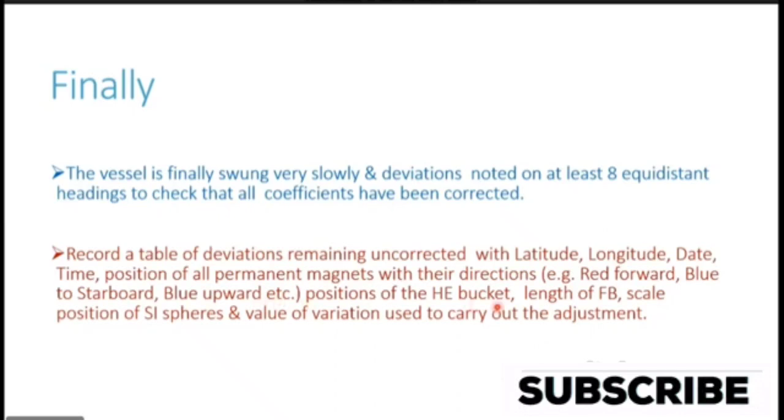For example, for a fore and aft magnet, the marking made on the deviation card is red forward, or blue to starboard for an athwartship magnet, and blue upwards for a heeling error corrector magnet. The position of the heeling error bucket, the length of the flinders bar, and the scale position of the soft iron spheres are all noted down in the deviation card.

Also, the value of variation present at that location, which was also used to carry out the adjustment, is noted down in the deviation card, thus completing the correction of the compass and preparation of the deviation card.

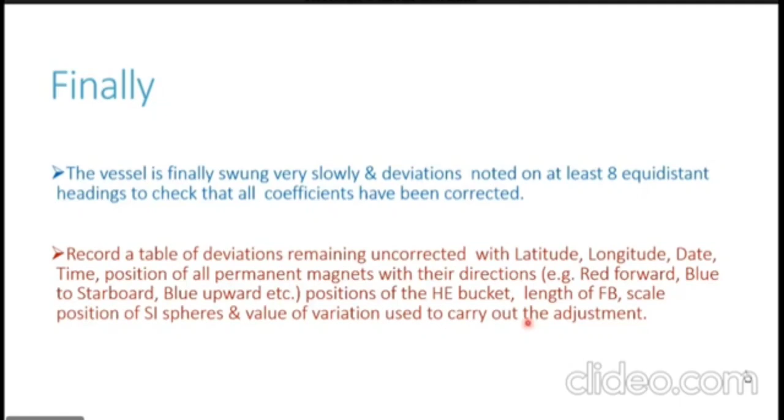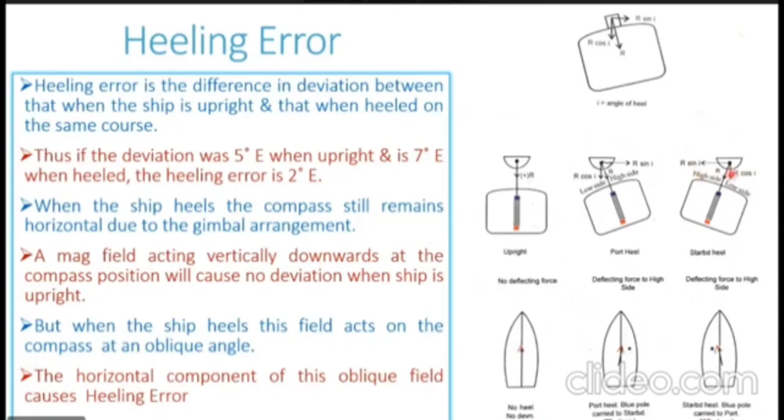Now when the vessel is rolling, this oblique field or force acts in opposite directions during the port and starboard rolls, leading to oscillation of the compass card.

You can see in this condition the vessel was upright, the vertical field was not causing any deviation - no heel, no deviation, no deflecting force. When there is a port heel, the vessel's hull heels to port, the compass bowl remains horizontal. The horizontal field of this oblique magnetic field, R sine I, now acts to the starboard side of the ship. So there's a deflecting force to the high side, the starboard side, and we have a blue pole to the starboard side of the compass location, causing easterly deviation. So as mentioned, on port heel, the blue pole is carried to the starboard side, generating easterly deviation.

Now when the vessel heels or rolls to the starboard side, this oblique field acts in this direction - you can see the R sine I component of the field acting this way. So the deflecting force is towards the high side, which is the port side. In case of starboard heel, the blue pole is carried to the port of the compass bowl or compass card, generating westerly deviation. This blue pole attracts the red end of the compass needle pointing towards north, generating a westerly deviation.

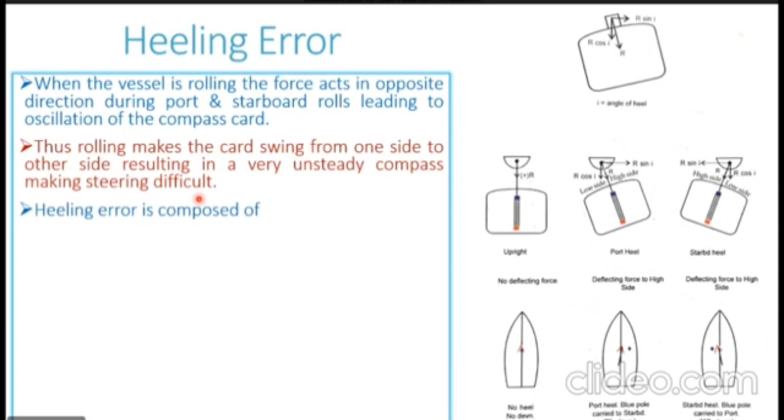Now this heeling error is composed of two components. Heeling error could be generated because of permanent magnetism of the ship - in that case it's known as permanent heeling error, generated due to the force R or component R. In this diagram, we see this permanent magnetism of the ship, the vertical component R of the permanent magnetism, causing the permanent heeling error. The permanent heeling error varies as the cosine of the compass course.

The second cause which can generate heeling error is induced magnetism in the ship, called induced heeling error. This is predominantly caused by induced magnetism in two kinds of structures. If we have a vertical soft iron, VSI, above or below the compass - also known as a K rod - this VSI exactly above or below the compass generates induced heeling error. For example, if we have a centerline bulkhead in the accommodation with a lot of vertical stiffeners welded to it, this centerline bulkhead will have a substantial soft iron component, inducing magnetism that generates induced heeling error.

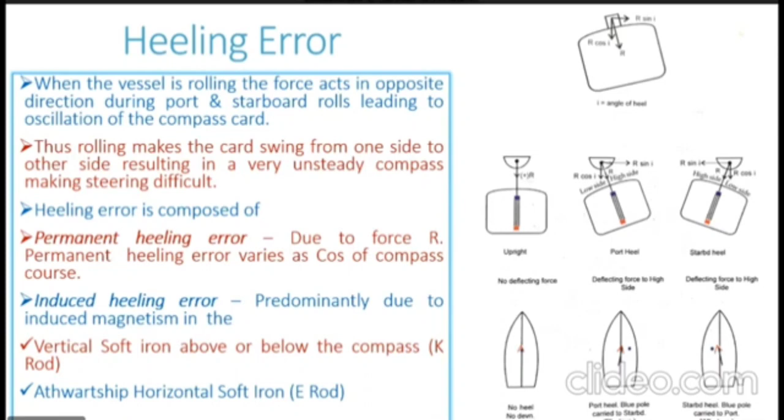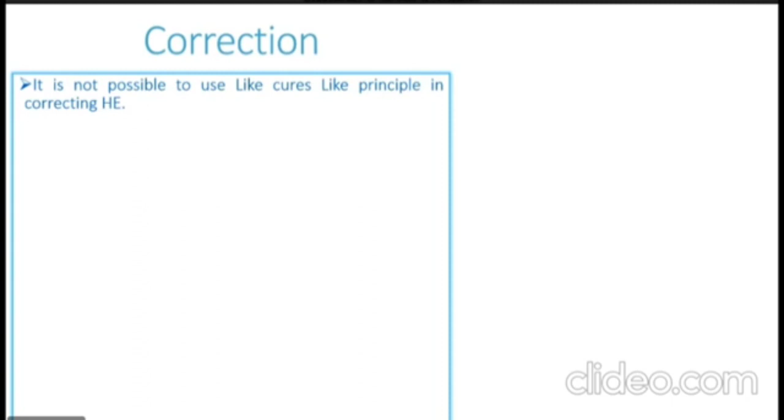So now we have seen that the heeling error is caused because of permanent as well as induced magnetism of the ship. As per our correction principle of like cures like, we should correct both these components with their respective correctors: permanent should be corrected with a permanent magnet, induced should be corrected with an induced magnet or a soft iron corrector. But we are not able to use this principle.

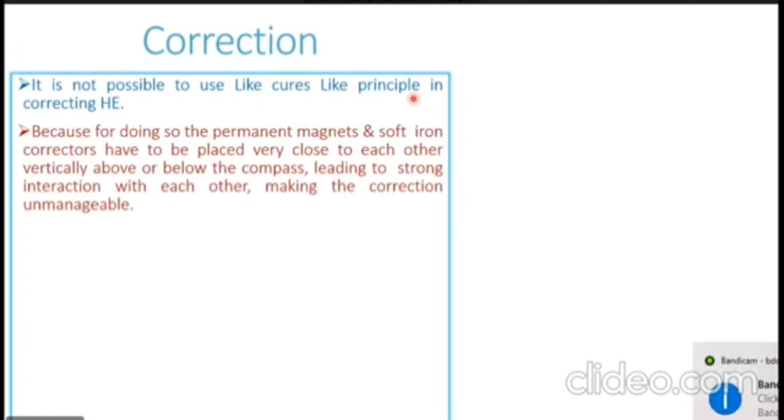Reason for this is, if we use the like cures like principle, the permanent magnets and the soft iron corrector will have to be placed very close to each other, vertically above or vertically below the compass. Since the permanent magnet and the soft iron corrector are very close, it will lead to a strong interaction with each other. The permanent magnet is going to generate a lot of induction in the soft iron corrector, making the correction unmanageable.

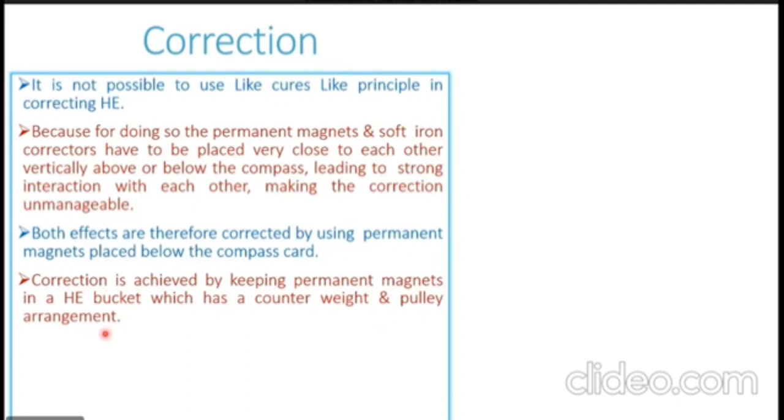Because of this reason, both these effects, permanent heeling error as well as induced heeling error, are corrected by using permanent magnets placed below the compass card. Correction is achieved by keeping the permanent magnets in a heeling error bucket, which has a counterweight and pulley arrangement. Let me show you in the diagram.

You can see the diagram of the heeling error corrector. We have the compass card in this location, and this is the binnacle. We have a permanent blue pole. You see the ship's blue pole below the compass. In the previous slide example, we saw that there was a blue pole exactly below the compass.

So now what we have here is, exactly below this compass card, we have a chain and pulley arrangement. You can see this pulley here, or you can call it a sprocket wheel, with a chain attached to it. On one end of this chain we have a counterweight, just to balance the heeling error bucket, and on the other end of the chain we have the heeling error bucket.

There are vertical slots in this bucket in which the magnets can be placed. So we place vertical magnets in this bucket. You can see these vertical magnets placed in the bucket. The magnets are placed in such a way that the correct end should be closer to the compass card.

In this particular example, we had a blue pole of the ship which was affecting the compass. So we have placed the permanent magnets in such a way that their red pole is closer to the compass card, thus correcting the heeling error. So this is the heeling error bucket, with the vertical magnets placed inside it.

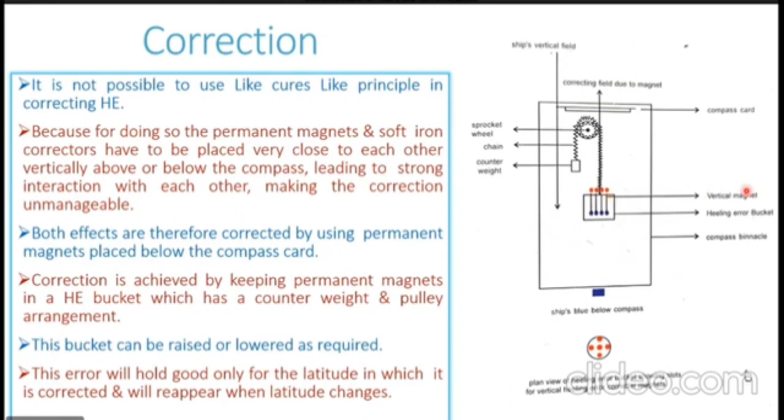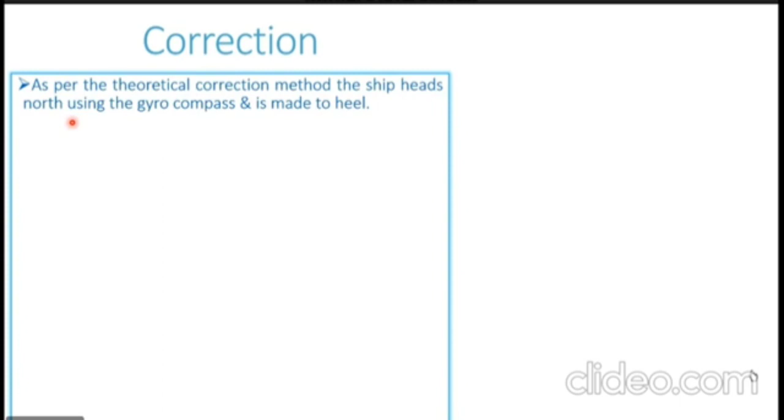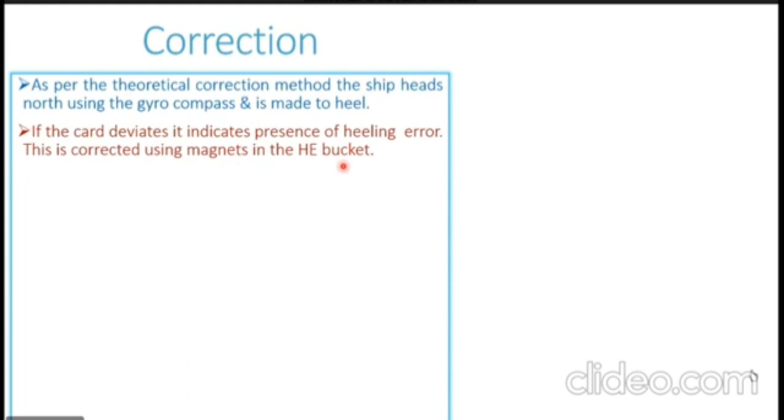Now, going further into the correction of heeling error, as per the theoretical correction method, the ship is made to heel when it is heading north, and when the ship is made to heel, the heeling error is generated. The card deviates, indicating the presence of the heeling error, and whatever the heeling error is, this can then be corrected using the magnets in the heeling error bucket.

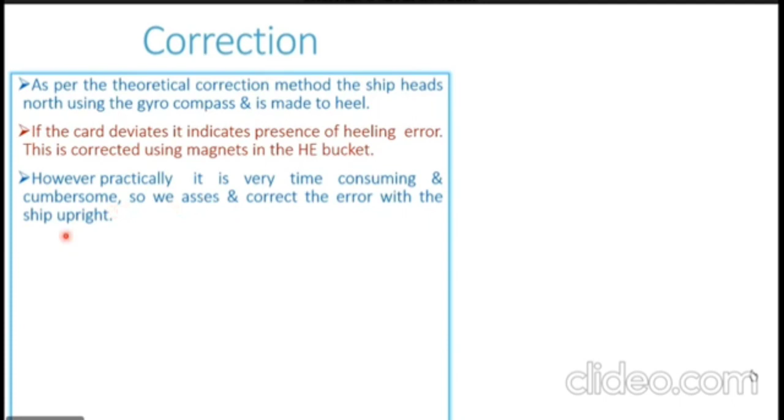Now, practically, this method is very time consuming and cumbersome. It takes a long time to heel the ship to one side, and we need a substantial heel angle to properly judge the heeling error and correct it. So instead of heeling the ship, we assess and correct this error with the ship upright. So how can we judge this error in the upright condition?

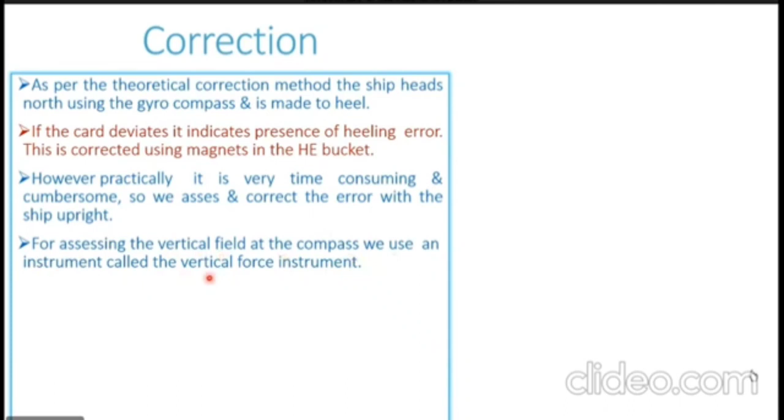For this, we use a special instrument known as a vertical force instrument, in short a VFI, to assess the vertical field at the compass location. Let me show you the diagram. A vertical force instrument, or VFI, is very similar to a dip needle.

A dip needle is free to move in the vertical plane, and wherever on Earth it is placed, as soon as it is released, it aligns itself in the direction of the magnetic field lines, giving us the dip angle. So this VFI is also very similar to a dip needle.

We have a knife edge support, and on this knife edge support we have a magnetic needle. This magnetic needle is free to move in the vertical plane. One end is the blue end of the magnet, and this is the red end of the magnet. On this knife edge support, it is free to move in the vertical plane.

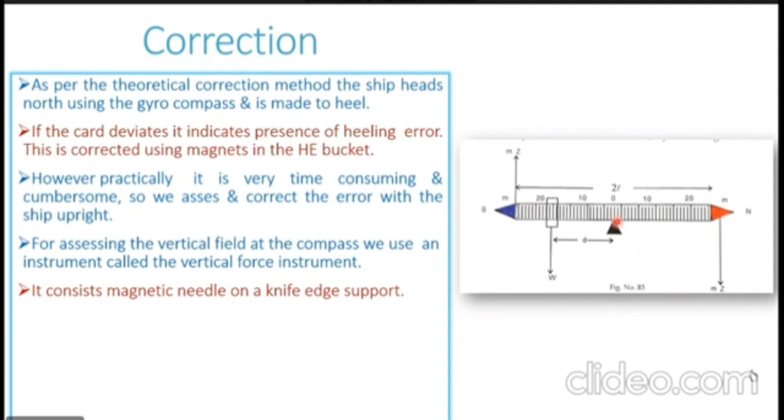What the compass adjuster does is first take the VFI, the vertical force instrument, and place it at some location ashore, away from any disturbing magnetic field. When placed in an area with no disturbance from any magnetic field, this needle aligns itself in the direction of the Earth's magnetic field. In the northern hemisphere, the red end will point downwards. In the southern hemisphere, the red end will point upwards.

Now there is a slider weight provided on this needle. You can see this particular weight here. This weight can be moved to whichever location we require. There is also a scale provided, so we can see the scale location of the weight.

So what is done is, let us assume we were in the northern hemisphere, and the red end of the needle has gone vertically downwards, pointing in the direction of the magnetic field line, while the blue end has gone upwards. This weight is initially placed exactly on top of the support, and as soon as the needle stabilizes with the blue end pointing upwards and red pointing downwards, we slide this weight to the high side, towards the blue side.

We slide it towards the blue side. Now the force of gravity is going to counteract the force of the magnetic field, and this blue end, which was pointing upwards, will slowly come down. As you take the weight away from the support, the lever at which the weight is acting increases, and it starts to balance the magnetic field.

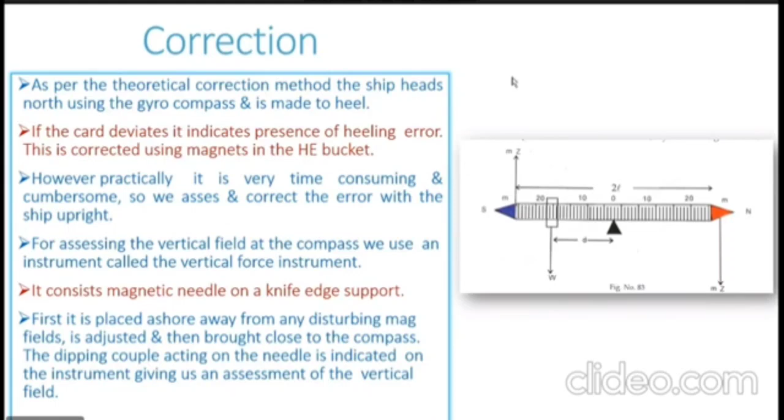A, B, C, D, and E, and we have seen how they are corrected individually. Now we are going to see when a compass adjuster actually corrects the compass on board, what is the sequence he follows in correcting the compass and what are the steps involved in the correction.

The first and foremost important thing to consider for the compass corrector is the order of placing the correctors. We have correctors for correcting different coefficients. The first thing which we need to analyze is what should be the order in which the correctors should be placed. We cannot place them as per our liking and choice. We do not have a choice here. They have to be placed in a specific order only.

This order is, first of all, the soft iron correctors are placed in the compass binnacle. And among these soft iron correctors also, we have the Flinders bar followed by the spheres.

After placing the soft iron corrector, the next correction which is done is the heeling error correction. So permanent magnets are placed in the heeling error corrector bucket and the error is corrected. After the heeling error correction, the next correction we do is placing the horizontal magnets to correct permanent B and permanent C. The larger coefficient out of the two, between permanent B and permanent C, is corrected first, and the weaker coefficient is corrected later. This is the sequence we follow for correction.

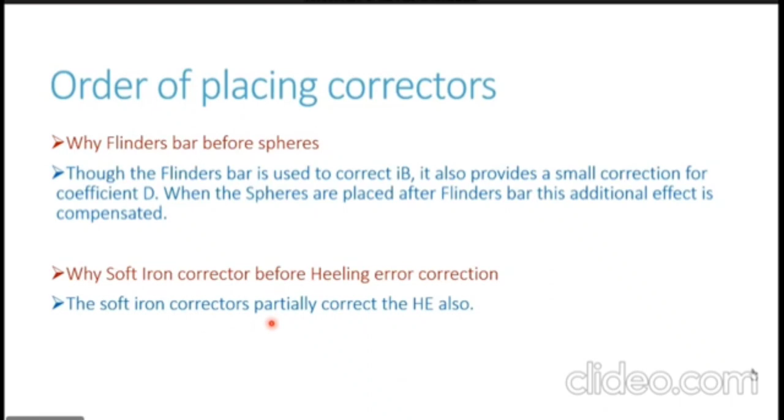Second, why the soft iron correctors are placed before the heeling error permanent magnet correctors: the soft iron correctors partially correct the heeling error. So once you place the soft iron corrector, the heeling error is corrected partially, and whatever heeling error remains can then be corrected by placing the heeling error correctors. In case the soft iron correction is not done before, the heeling error correction will be overdone. The heeling error will be over corrected.

Now the third concept: why do we place the soft iron correctors before the permanent correctors, that is permanent B and permanent C? The soft iron spheres increase the mean directive force at the compass location, thus allowing for a more accurate correction of permanent B and permanent C later on. As the spheres are placed, the mean directive force at the compass location increases.

This increase in the mean directive force results in reduction of the deviation because of any coefficient, giving us a more correct and accurate correction for permanent B and permanent C. The permanent correctors also induce some magnetism in the soft iron correctors, causing a disturbing field at the compass location. When the permanent magnets are placed after the soft iron correctors, the adjuster is able to compensate this disturbing field. Since the cause is the permanent magnet, when it is placed later on, it can be adjusted so that this extra induction does not cause any disturbance in the compass correction.

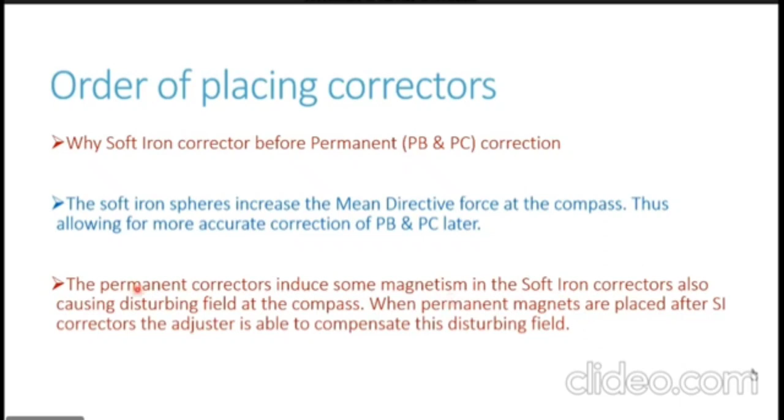Now there are many variations in the methods which we use for compass correction. Some methods are used to correct the compass, a brand new compass where there are no correctors placed for a brand new ship. And some of the methods are used for adjusting the compass later on, a partial adjustment.

Now what we see here is the analysis method, which is used for a full scale correction of the compass. That means if we have a brand new compass without any correction placed on board, the analysis method can be used to correct that compass and prepare the deviation card. So in this method, deviation is observed on various headings, analyzing the coefficients and then making the corrections in the order of placing correctors as we discussed in the previous slides.

Once the correctors are placed, the ship is re-swung to check for any large deviations left, finally leaving only a small amount of deviation.

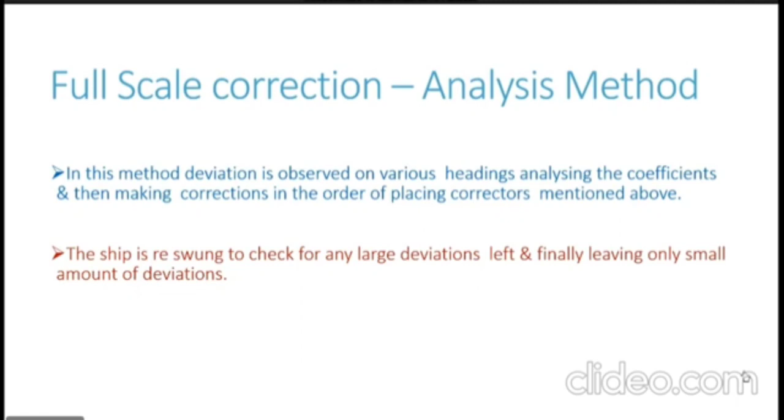So with the order of placing correctors clear in our mind, let us now go into how each corrector is evaluated and placed. First of all, we go for the flinders bar. This is the first corrector to be placed. Now it is very hard to calculate the exact amount of flinders bar that will be necessary or required in a particular ship and compass. We do not have any precise instruments.

So the experience of the compass adjuster comes very handy to him, and this guides the compass adjuster about the length of the flinders bar. As a general rule, sufficient flinders bar is placed to correct 3 to 4 degree deviation when the ship is heading in an easterly or westerly heading.

In case the funnel is very close or far away from the compass location, the correction magnitude has to be varied accordingly. When the compass adjuster approaches the ship, he looks at the structure of the ship and gets an idea of the location of the funnel with respect to the compass, and the distance between them. If he finds it a normal, regular distance, he will do the correction of up to 3 to 4 degrees of deviation.

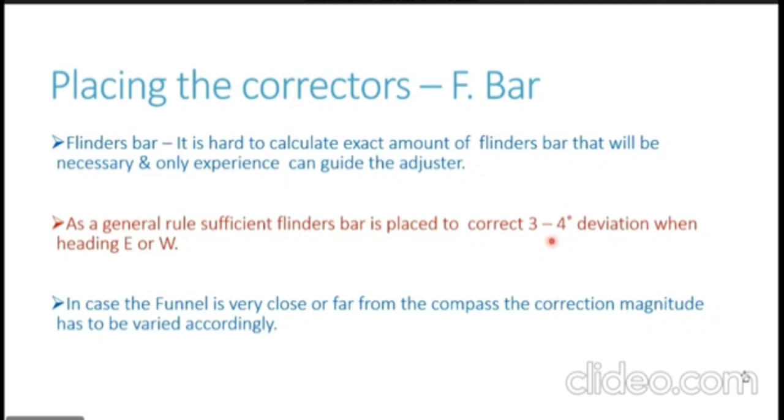Now the next correction after the flinders bar are the soft iron spheres for correction of coefficient D. For placing the spheres, the compass adjuster needs to obtain the deviation on all the cardinal and intercardinal headings. So before he goes ahead with the correction, he swings the ship a complete round and notes down the deviation on all the cardinal and intercardinal headings at least.

Now these deviation readings help him to ascertain or evaluate the magnitude of all the coefficients. We have formulas for the coefficients with which we can calculate their magnitude, and this helps us to ascertain the amount of correction we require.

For example, the magnitude of coefficient D can be obtained by using this formula: coefficient D equals deviation on northeast heading minus deviation on southeast heading plus deviation on southwest heading minus deviation on northwest heading, divided by 4.

Once coefficient D is calculated and the compass adjuster knows the magnitude of correction needed, he takes the ship on any one of the intercardinal headings. We go on an intercardinal heading because all coefficients are corrected on the heading where they are most powerful, and coefficient D is most powerful on intercardinal headings while it is zero on cardinal headings.

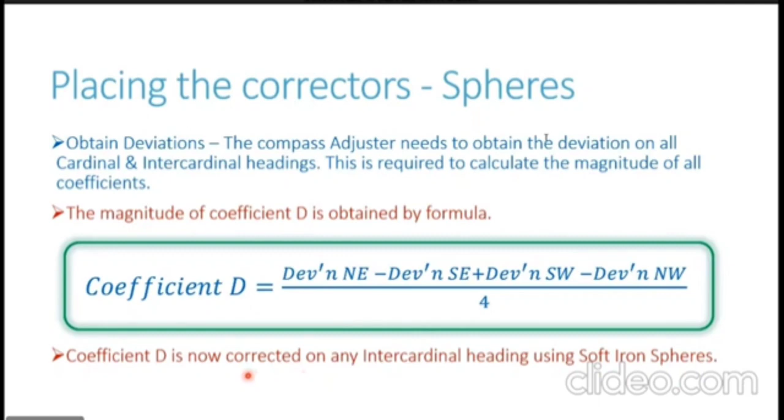Next, moving on to the heeling error correction. For this, we need the vertical force instrument, which consists of a magnetic needle free to swing in the vertical plane. First, the compass adjuster has to adjust or balance this VFI.

He balances the VFI at the latitude or location where the ship is, at a place far away from any magnetic disturbances. Then he brings it onto the ship and judges the vertical field at the compass location, and corrects it using the heeling error bucket. This is exactly what we saw in the heeling error presentation.

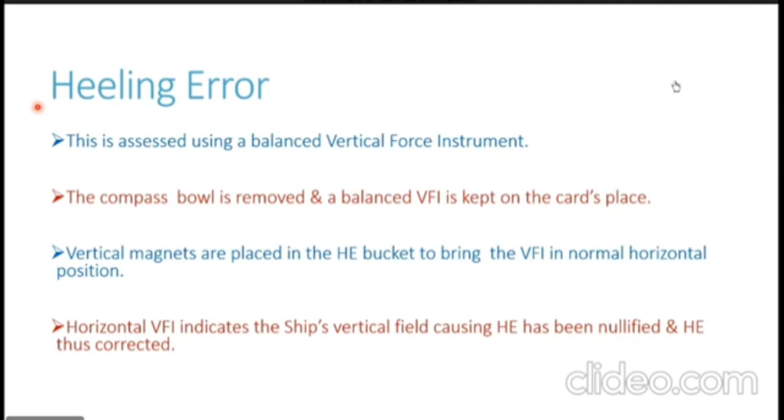After the heeling error, next are the corrections for permanent B and permanent C. The bigger coefficient is corrected first, so the compass adjuster first judges the magnitude of the coefficient and then uses it to correct the coefficient.

So how do we obtain the magnitude? Coefficient B magnitude is obtained by deviation on easterly heading minus deviation on westerly heading, divided by 2. Once the adjuster has an idea about the magnitude of the coefficient, he can place the fore and aft corrector magnets.

The ship is made to head on an easterly or westerly direction, since this is where coefficient B is strongest, and the fore and aft permanent magnets are placed to correct the coefficient permanent B.

The magnets are placed two in a row side by side, and the number of pairs can be increased or decreased. Also, the distance of the magnets from the compass location can be increased or decreased, as there are a number of slots provided in the binnacle. By varying the number of magnets and their distance from the compass location, the compass adjuster can vary the correction for permanent B.

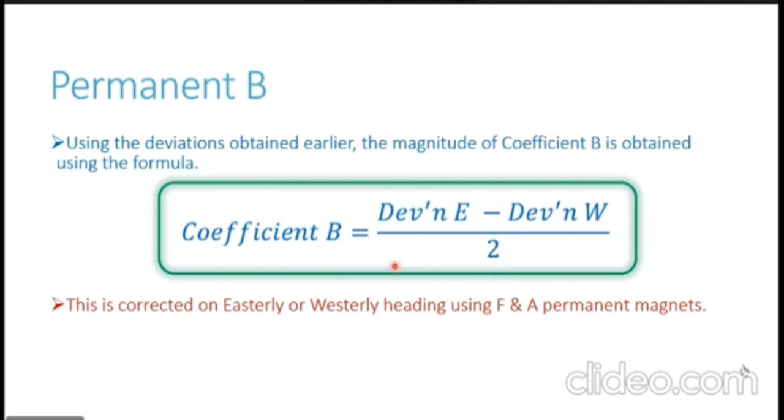The correction of permanent C is done exactly the same way as coefficient B, using the deviations obtained earlier. First, the magnitude of coefficient C is obtained. The formula for coefficient C magnitude is deviation on northerly heading minus deviation on southerly heading, divided by 2.

Once the magnitude is obtained, the vessel heads on a northerly or southerly heading, and athwartship permanent magnets are placed to correct coefficient C.

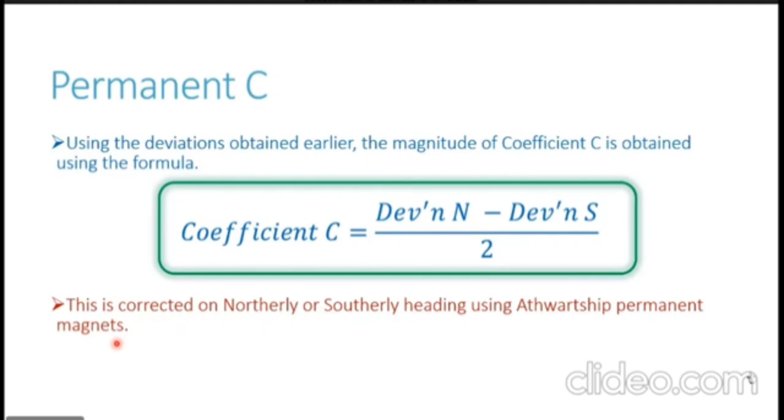After placing these correctors, we move to coefficient A, induced C, and coefficient E. Induced C and E are very rare on a normal merchant ship, so any remaining deviation in the compass is considered to be the result of coefficient A, which, if present, is applied as an index error.

Coefficient A's value can be obtained as the mean of the deviations on at least 4 equidistant headings. If you remember, we had noted down the deviations before starting the compass correction. So the compass adjuster can easily calculate the magnitude of coefficient A by taking the mean of deviations on at least 4 equidistant headings. Normally this is done using deviations on 8 headings, that is cardinal and intercardinal, to get a more accurate reading.

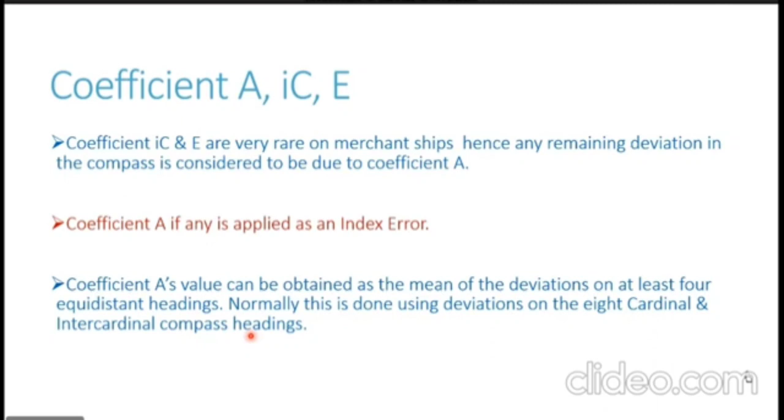The soft iron spheres which we have placed to correct coefficient D also give us one more beneficial effect, and that is the increase in the mean directive force at the compass location. More the directive force, better will be the directional ability of our compass. Placing these spheres increases the mean directive force at the compass location. When the directive force increases, this indirectly reduces the deviation caused by any other coefficient, giving us a beneficial effect.

Now, how do the spheres increase the mean directive force? Let's understand.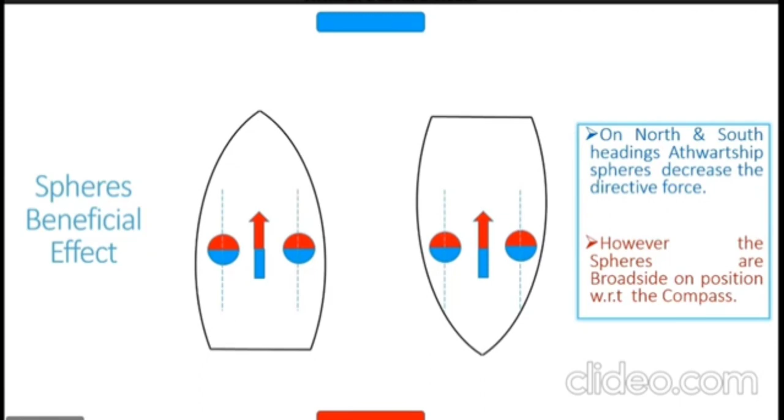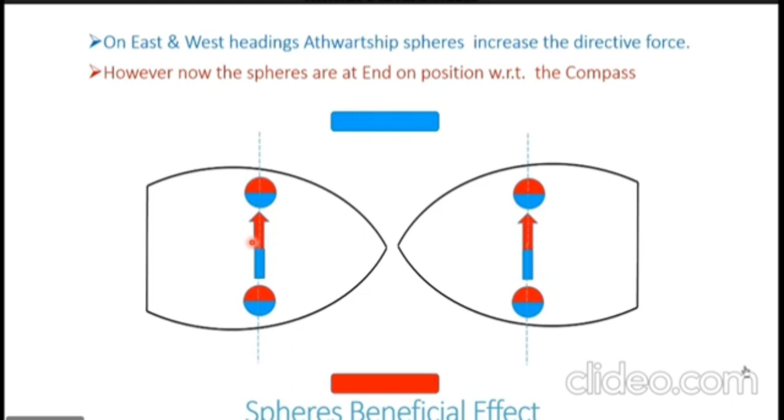With both poles matching, the sphere's corrector magnet increases the mean directive force at the compass location, and this increase is much more powerful compared to the decrease. Why is this increase much more powerful? Because if you look carefully, the compass is at an end-on position to the corrector magnets, exactly in line with their axis, and being in line with the axis, the increase in directive force has much more magnitude compared to the decrease which was happening on northerly or southerly headings.

The same thing is mentioned again: since the effect of a magnet is twice as powerful in the end-on position compared to the broadside-on position, the increase in directive force is twice the decrease. Increasing the mean directive force leads to a reduction in the overall deviation.

Based on the magnetic compass, these types of questions involve the concepts of magnetism and the related coefficients. The question says: at Antofagasta, Chile, a ship was lying on a heading of 270 degrees. Maximum deviation was found to be 3 degrees east.

If the permanent magnetism was corrected using forward and aft corrector magnets, state the possible reasons for getting this deviation and how it can be corrected.

Before we go into the question, one important thing to understand is that in these types of questions, you cannot pick the answers directly from the book. These questions basically test our understanding of the coefficients, the magnetism of the earth, and the magnetism of the ship, and you will need to apply your understanding to find the solution. So let us go into the solution now and try to apply this.

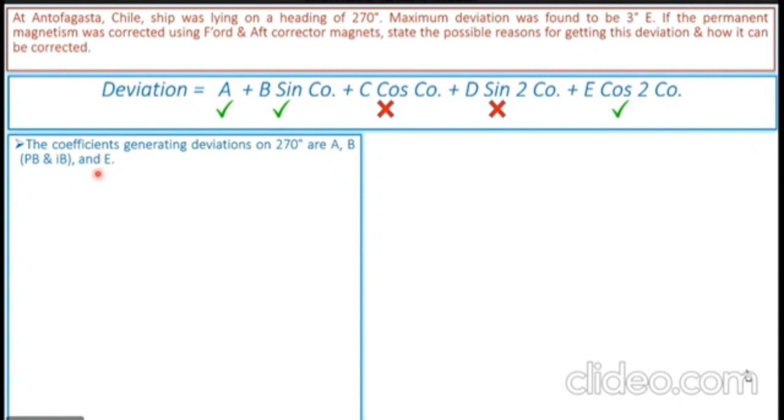Now as far as coefficient A is concerned, it is not generally present on normal merchant vessels, as we do not have any unsymmetrical horizontal soft iron on the ship. Whatever horizontal soft iron is present on the ship is symmetrical about the compass location, whether it's the fore and aft longitudinal or the athwart ship beam. So coefficient A is generally absent on normal merchant vessels, and the probability of deviation being generated by coefficient A is not there.

Moving on to coefficient E now. Coefficient E is also not generally present on normal merchant vessels, as we need horizontal soft iron symmetrical at a 45-degree orientation to the fore and aft line for generation of coefficient E. Usually on normal merchant vessels, we do not have any HSI at a 45 degree angle to the fore and aft line; whatever HSI we have on board is either fore and aft longitudinal or athwart ship beam. So coefficient E is also absent on normal merchant vessels, and the probability of coefficient E is also not there.

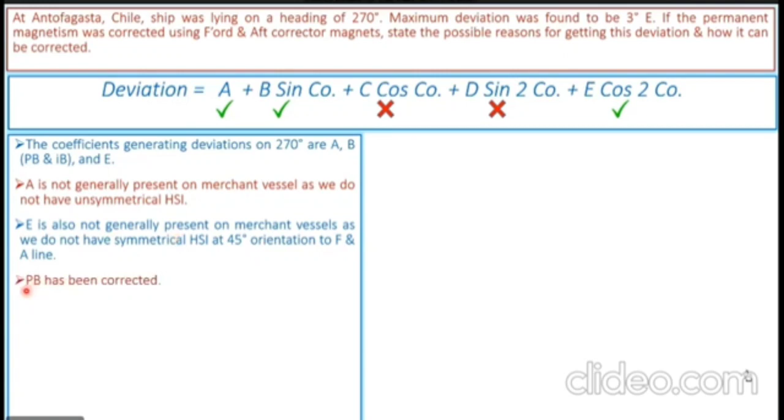Now coming to coefficient B. In coefficient B, the question tells us the permanent magnetism was corrected using fore and aft corrector magnets. The forward and aft corrector magnets correct the permanent B part of coefficient B. So it is mentioned in the question that permanent B has been corrected. The only option which now remains is the induced B part. So induced B is the most likely cause of this deviation which is being generated on the ship.

Now this gets strengthened by the fact that there is no mention of correcting the induced magnetism in the fore and aft direction. The question doesn't tell us anything about correction of the induced magnetism. So this deviation which is generated is because of induced B.

So let us see how induced B can generate this easterly deviation. For this we need to be aware that Antofagasta port in Chile is in the southern hemisphere. It is at about 23° south latitude.

And in the southern hemisphere we are aware that the magnetic lines of force come out of the Earth's surface. So IB, induced B, which is generated by VSI, vertical soft iron - if there is any vertical soft iron in the southern hemisphere, the lines of force coming out of the Earth's surface will enter from the bottom, giving it a blue polarity, and will come out from the top end of the VSI, giving it a red polarity. So the top end of all the vertical soft iron in the southern hemisphere will be red. This top end is what affects our compass.

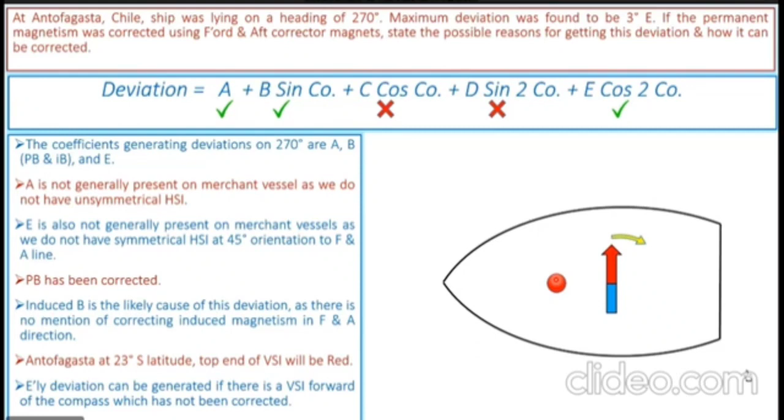Question on the screen now. The question says, on board a vessel with a constant 2-degree east deviation on all the headings, following permanent corrector magnets were observed, placed as given in the compass binnacle. Number 1, corrector magnet in the fore and aft direction with the blue forward and the red aft. Number 2, a corrector magnet in the athwartship direction with red on starboard and blue on port. Explain with suitable sketches what could be the reason for placement of correctors in the above manner.

Part B of the question asks what could be the reason for a constant deviation on all the headings. Let us now try to go into detail and understand the answer for this particular question.

We are aware that the fore and aft corrector magnets correct the permanent B coefficient of the ship. If we have a corrector magnet which has a blue end forward and a red end aft, it simply shows that the ship has a red bow and blue stern. If the ship is having a red bow and we place a corrector magnet with the blue end forward, towards the bow, this corrector blue is going to cancel out the red bow of the ship.

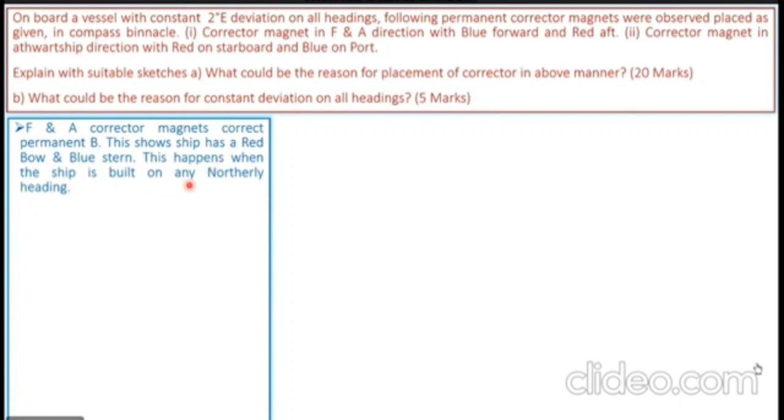If the ship is being built on a northerly heading, the magnetic field lines will be entering from the stern and leaving out from the bow. The part where the lines enter gets a blue polarity, that's why the stern of the ship has a blue polarity, and the part where the magnetic lines of force come out gets a red polarity. So that shows us the bow of a ship has a red polarity. This tells us that the vessel is built heading north.

Now moving on to the second part of the question. Athwartship magnets placed in the binnacle correct coefficient permanent C. The placement of the corrector magnet shows that the ship has a blue pole on the starboard beam or starboard side and a red pole on the port beam or port side.

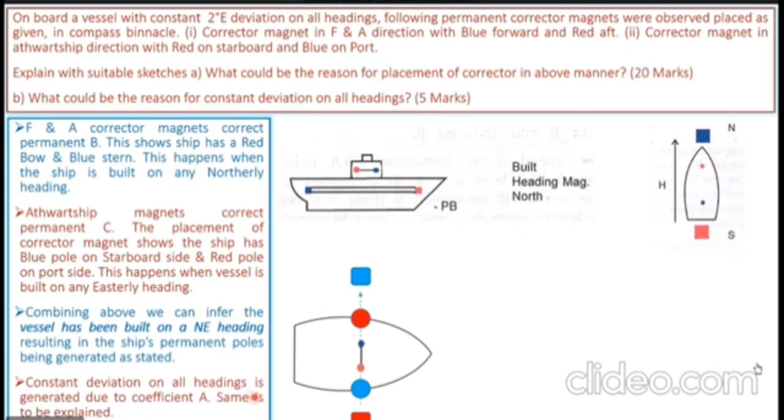Now moving on to the second part of the question: what could be the reason for a constant deviation on all the headings? We are aware that a constant deviation on all the headings is generated by coefficient A. Constant deviation on all the headings is generated due to coefficient A. So the same is to be explained in this part of the question. You can make the deviation diagram for coefficient A and explain this diagram. That takes care of the second part.

Coefficients of the magnetic compass are denoted by positive or negative signs. We are now going to understand how this positive and negative sign is given to a coefficient.

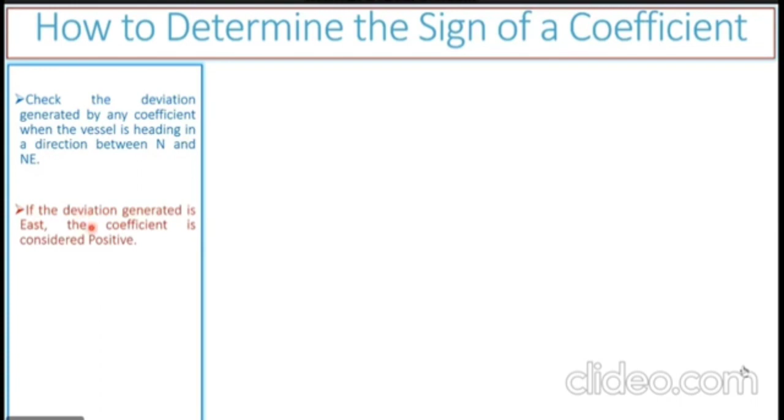To find out whether a coefficient is positive or negative, check the deviation generated by that particular coefficient with the vessel heading in a direction between north and northeast. If the deviation generated is east, the coefficient is considered positive, and if the deviation generated is west, the coefficient is considered negative.

Let me show you by a diagram. Assume we have a ship built on a northerly heading. The red represents the red pole of the earth, the blue square represents the blue pole of the earth. Magnetic lines of force come out of the red pole and go into the blue pole, and the arrow shows the sign of the magnetic field lines. These magnetic field lines enter from the stern of the ship, and wherever the magnetic field lines enter, you get a blue polarity, so this ship has a blue stern. The magnetic lines of force come out of the bow, giving it a red polarity, so this ship has a red bow. So a ship built on a northerly heading will have a blue stern and a red bow.

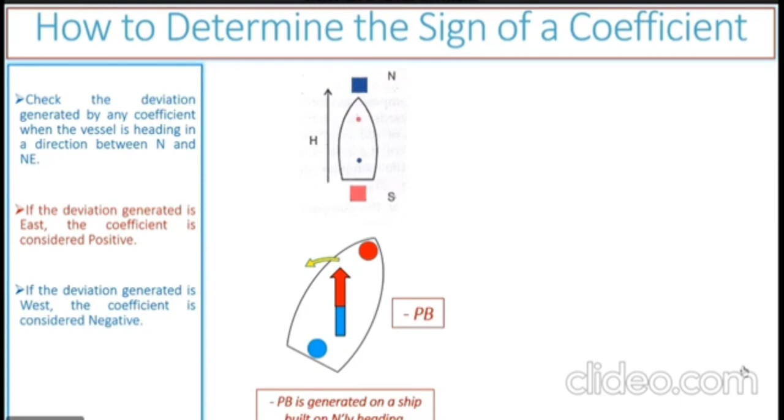Now let's try to analyze this for a ship which is built on a southerly heading. The lines of force are going to enter from the bow, giving it a blue polarity, so we have a blue bow. The lines of force come out from the stern of the ship, giving it a red polarity, so the stern of the ship is red.

Now let's take the ship on a heading between north and northeast. It has a blue bow and a red stern. The blue bow is going to attract the red end of the compass needle towards itself, generating an easterly deviation. Likewise, the red stern is going to attract the blue end of the compass needle. Moving, the compass needle is going to turn clockwise, generating an easterly deviation.

So this coefficient, which is permanent B, will be considered positive, plus permanent B. So you can summarize, plus PB is generated on a ship built on a southerly heading. The conclusion is: negative PB is generated on a ship built on a northerly heading, and plus PB is generated on a ship built on a southerly heading.

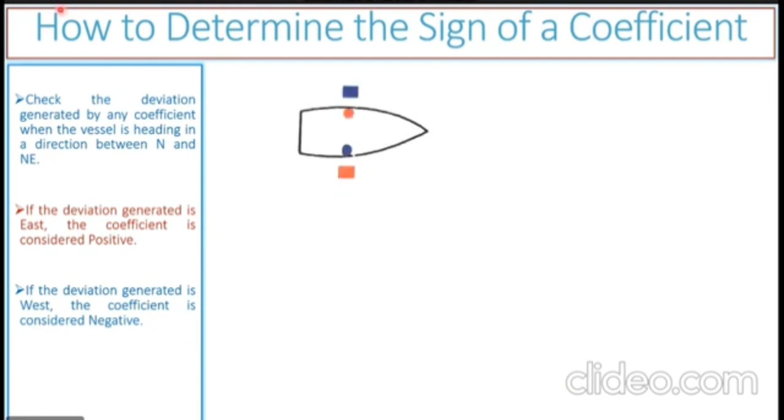Let's analyze this positive and negative sign convention for coefficient permanent C also. Assume we have a ship built on an easterly heading. Magnetic lines of force enter from the starboard beam, giving it a blue polarity, and come out of the port beam, giving it a red polarity. Lines of force come out of the south pole or red pole of the earth, and enter into the north pole or blue pole of the earth. So a ship built on an easterly heading will have a blue starboard side and a red port side.

Now let's take the ship on a heading between north and northeast. You see the ship heading in a direction between north and northeast. We have the compass needle present here.

There is a blue pole on the starboard bow and starboard beam, and a red pole on the port beam. The red pole on the port beam is going to repel the red end of the compass needle. Likewise, the blue pole on the starboard beam is going to repel the blue end of the compass needle, turning it clockwise and generating easterly deviation. You can see the compass needle swing as shown by the yellow color arrow, generating easterly deviation.

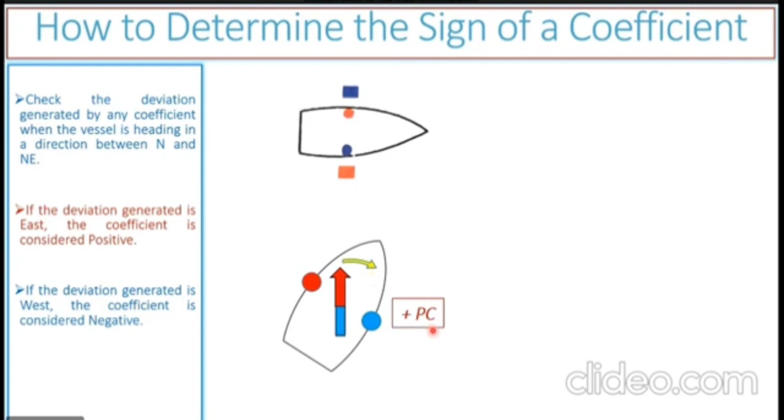Since easterly deviation is generated, this will be called plus PC, plus permanent C. So it can be summarized: plus PC is generated on a ship which is built on an easterly heading.

Let us analyze this for a ship which is built on a westerly heading. This ship is built on a westerly heading. We have the red pole, south pole of the earth, represented by this square. We have the blue pole, the north magnetic pole of the earth, represented by the blue square.

Magnetic lines of force come out of the red pole and enter from the port beam, giving it a blue polarity. Wherever the lines enter, we get a blue polarity. The lines of force come out from the starboard beam, giving it a red polarity. Wherever the lines of force come out, we have a red polarity there. So this particular ship has a red starboard beam and a blue port beam.

Let us analyze the ship on a heading between north and northeast now. So we have the same ship here heading somewhere between north and northeast. Starboard beam is red as mentioned in the top diagram, and port beam is blue.

Now you can clearly see the blue port beam is going to attract the red end of the compass needle towards it, making the compass needle move anti-clockwise looking from top, generating a westerly deviation. This deviation is shown by the yellow color arrow here. Likewise, the starboard beam having a red polarity is going to attract the blue end of the compass needle, generating a westerly deviation. Now, since a westerly deviation is being generated, this will be considered as negative.

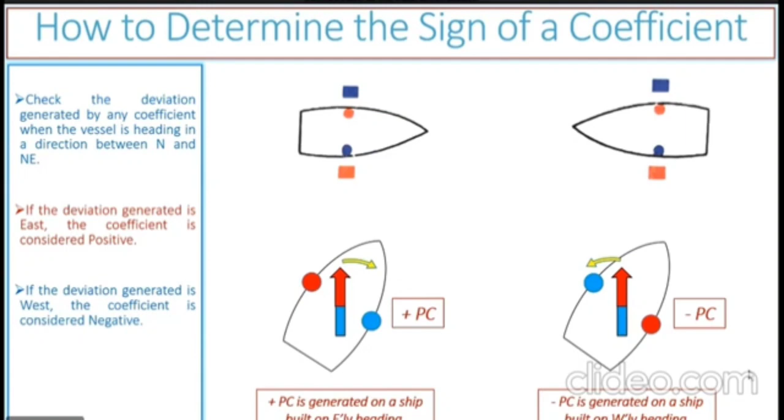So the question is in three parts. Part A of the question says: if a ship has negative PB and a positive PC, in which quadrant was she heading when built?

Part B of the question says: if the directive force on northerly heading is greater than the directive force on southerly heading, what coefficient is present and what is its sign? And the third part of the question says: if directive force on easterly heading is greater than directive force on westerly heading, what coefficient is present and what is its sign?

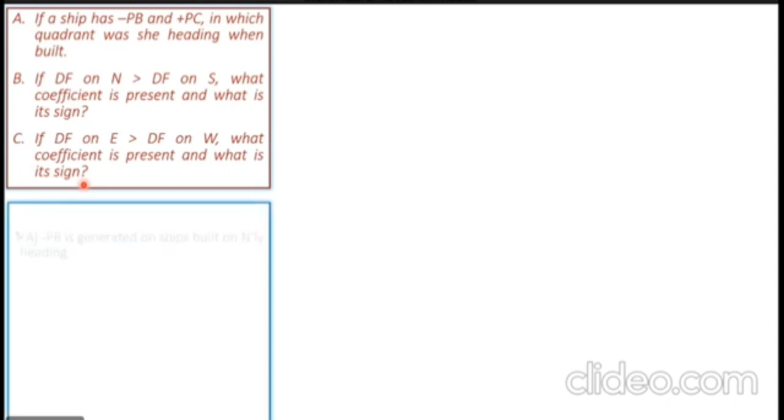Try to analyze and understand this question part by part. We go into the first part. If a ship has minus PB, negative PB.

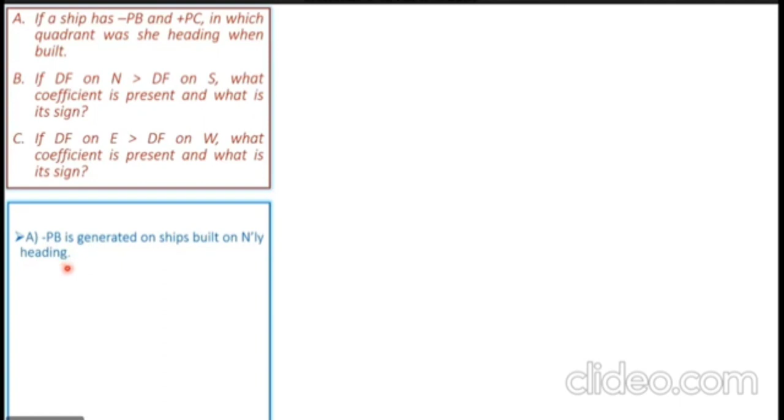We just saw that a negative PB is generated on ships which are built on northerly headings. Let me again show you the diagram. You can see we have a ship which is built on a northerly heading. It has a red bow. If you take the ship on a northeasterly heading, this red bow repels the red end of the compass needle, generating a westerly deviation, which gives rise to minus PB.

So the question says that the vessel has minus PB. Minus PB is generated on a ship which is built on a northerly heading. So this simply tells us that the heading of the ship on which it was built has a northerly component. Whatever heading she was built on certainly had a northerly component.

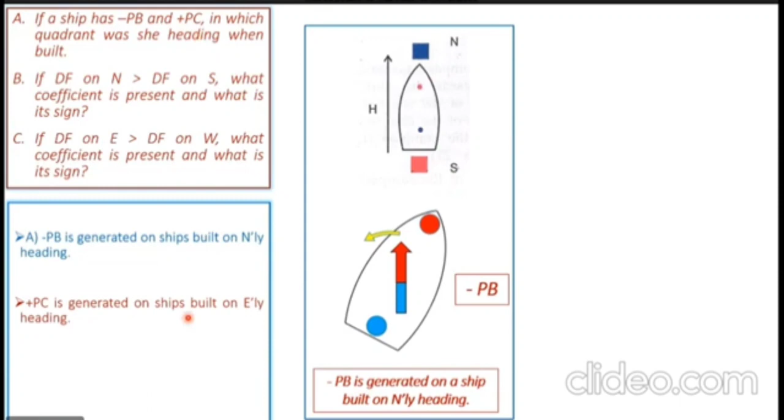Now the question says that the ship has positive PC, or plus PC. Positive PC is generated on ships which are built on easterly heading. So let me again explain this to you using the diagram.

Have a look at this ship which is built on an easterly heading. It has a red port beam and a blue starboard beam. Let us take this ship on a heading between north and northeast. You can see that this red port beam repels the red end of the compass needle, generating an easterly deviation, making it plus PC, plus permanent C.

So plus PC is generated on a ship which is built on an easterly heading. Combining both these factors, it clearly tells us that the vessel is built heading in a northeasterly direction. Whatever the heading of the ship at the time of shipbuilding, it has to have a northerly component which gives rise to minus PB, and an easterly component which gives rise to plus PC, explaining that the vessel is heading northeasterly when built.

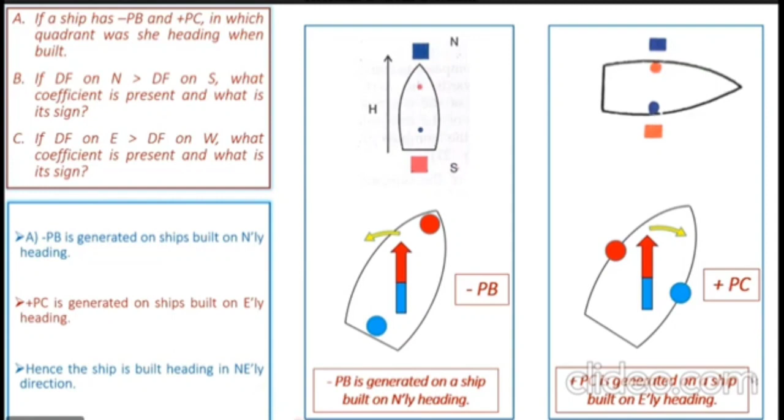Okay, up to here. The second part of the question says: if directive force on northerly heading is greater than directive force on southerly heading, what coefficient is present and what is its sign? Let's try to analyze this statement.

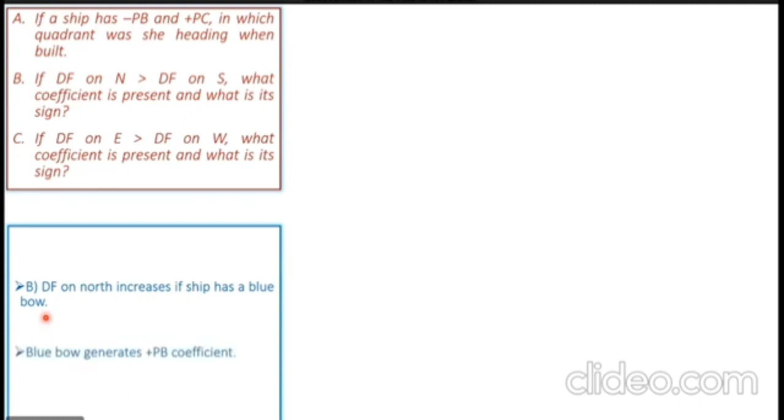Directive force on a northerly heading can increase only if the ship has a blue color bow or blue polarity bow. Let us understand this using a diagram. I have placed the ship on a northerly heading. The question says that the directive force on a northerly heading is greater.

For the directive force to be greater, the ship's pole should match the Earth's pole. We know the north magnetic pole of the Earth has a blue polarity, so north of the compass needle we should have a blue ship's pole. That is only possible when the ship has a blue bow, indicated by the blue pole in the diagram. At the same time, the south pole of the earth has a red polarity, so if we have a red pole south of the compass needle, it increases the directive force. So an increase in directive force on northerly heading would happen on a ship if it has a blue bow and a red stern.

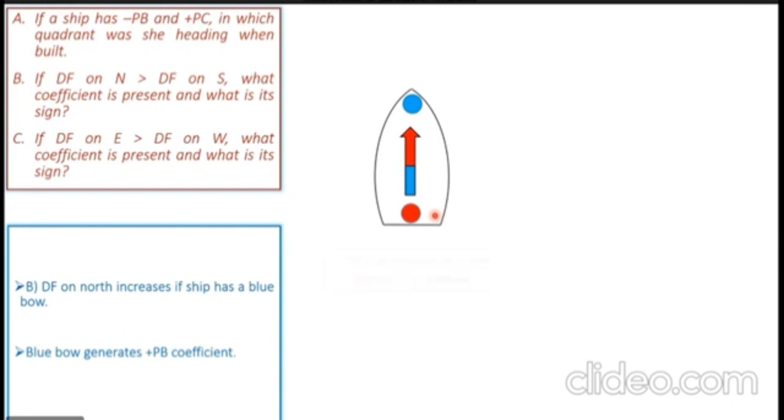Now if a ship has a blue bow and a red stern, which coefficient does it have? Let us take this ship on a northeasterly heading, somewhere between north and northeast. The blue bow attracts the red pole of the compass towards it, generating an easterly deviation, telling us it is a positive permanent B coefficient. Magnetism in the fore and aft direction generates coefficient Bravo, and these are permanent B coefficients because these are permanent poles of the earth and permanent poles of the ship. So this explains that a vessel whose directive force increases on northerly heading has a positive PB coefficient. The answer to this part will be positive permanent B coefficient.

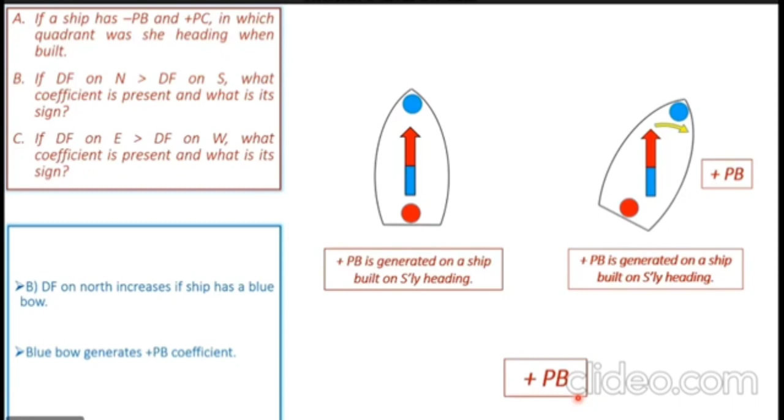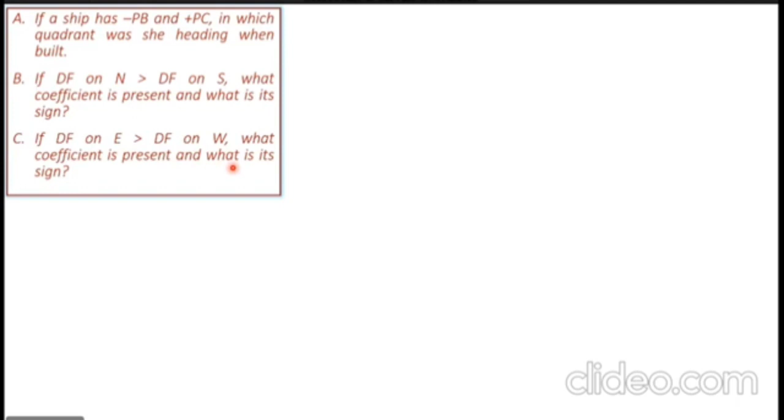Now we move on to the third part of the question. It says: if directive force on easterly heading is greater than the directive force on westerly heading, what coefficient is present and what is its sign? Directive force on an easterly heading can increase if there is a blue pole on the port beam of the ship. Let me explain this using a diagram.

We have a ship here which is on an easterly heading, and the question says that the directive force on an easterly heading is greater. For the directive force to be greater, the ship's pole and the earth's pole should match. North of the compass we have a blue pole of the earth, since the earth's north pole has a blue polarity. So the ship's pole also has to be blue there. So if you have a blue pole on the port beam, it matches with the blue pole of the earth, increasing the directive force. Likewise, if you have a red pole on the starboard beam, it matches with the red, south magnetic pole of the earth, and increases the directive force.

So this tells us that the ship has a blue port beam and a red starboard beam. Now magnetism in the athwart ship direction generates coefficient C. So this ship has coefficient C, and this is permanent magnetism, so this is permanent C.

Let us now try to find out whether this is positive or negative. For this, we take the ship on a heading between north and northeast. It has a red starboard beam and a blue port beam. You can clearly see the blue port beam attracting the red end, or the north end, of the compass needle towards it, generating a westerly deviation. Westerly deviation means it has a negative sign, so this coefficient is negative PC.

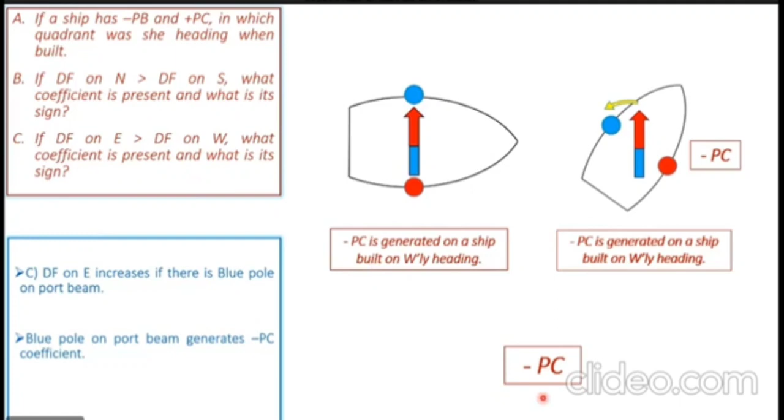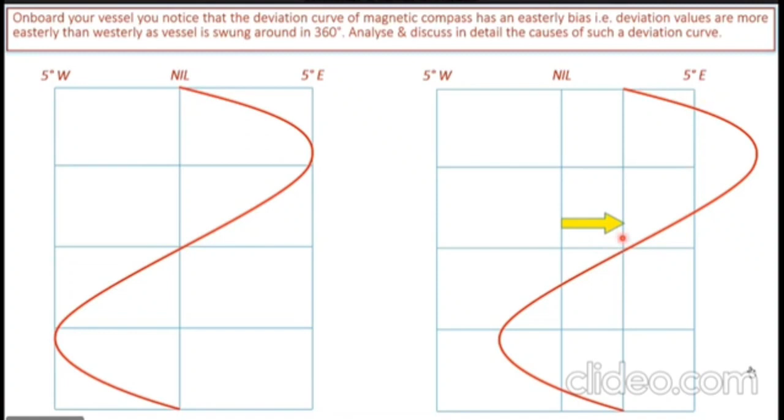Now the question says that on a particular ship it has an easterly bias, that is, deviation values are more easterly than westerly. Let me show you what the question means. Now you see a different deviation curve, and if you notice, it has shifted in the easterly direction by this much value - you see this yellow arrow. Basically the curve has shifted to the eastern side. The right side is the easterly deviation, so it has shifted to the easterly side by a fixed value. Let us assume it has shifted by 2 degrees east.

So what is the cause of such a deviation curve? Now we can see that if you check the deviation at any particular point, it will be the deviation in the previous curve plus a value of 2 degrees east. So it was 0 here, nil, and if you look here, it is 2 degrees east. The maximum value was 5 degrees east, and if you look here, it will go up to 7 degrees east. So you see a constant difference in all the deviation values towards the eastern side.

Now, what could be the cause of such a deviation? We know that of all the coefficients, there is one coefficient which is constant, does not depend upon the heading of the ship, and remains constant over all headings, and that is coefficient A. So this is the coefficient present in this particular ship, coefficient A. It has a value of 2 degrees east, and this coefficient A, if present on a ship, is usually not shown in the deviation curve. It is applied as an index error.

So you can have a normal curve like this, and the compass adjuster is going to mention that coefficient A here is 2 degrees east. This 2 degrees east can be applied to the value of deviation at any particular heading, and it will give you the deviation for that particular ship. So we need to explain coefficient A in this question, making the deviation diagram and explaining the deviation on all cardinal and intercardinal headings.

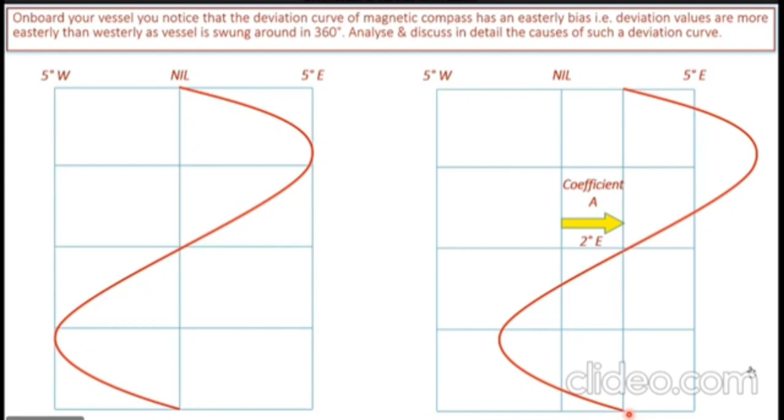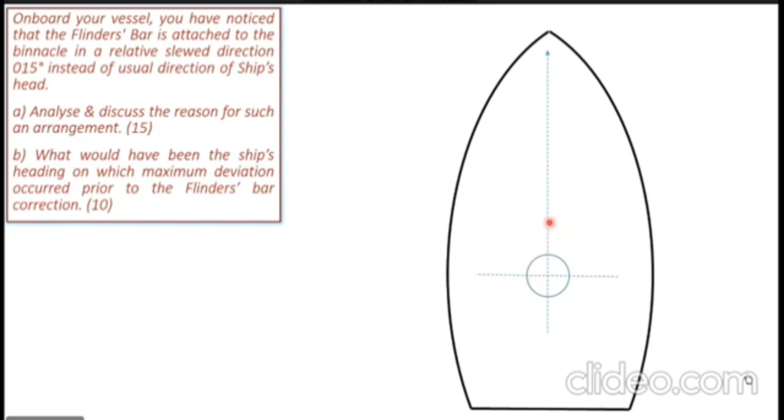Now the question says the Flinders bar is attached to the binnacle in a relative slewed direction of 015 degrees. The 015 degrees is basically the relative direction of the Flinders bar with respect to the ship's head. So from the ship's head, if you go 15 degrees - let me show you here in the diagram - you can see from the ship's head, if we go 15 degrees, the relative bearings are measured clockwise from the ship's head. So if you go to this 15 degrees direction, this is where the Flinders bar lies.

On a usual ship, the Flinders bar opposes the vertical soft iron present on the ship. On a normal merchant vessel, the main vertical soft iron, most predominant, is the funnel. The funnel is usually exactly aft of the compass. So to compensate the funnel's effect, the Flinders bar is fixed up just forward of the compass.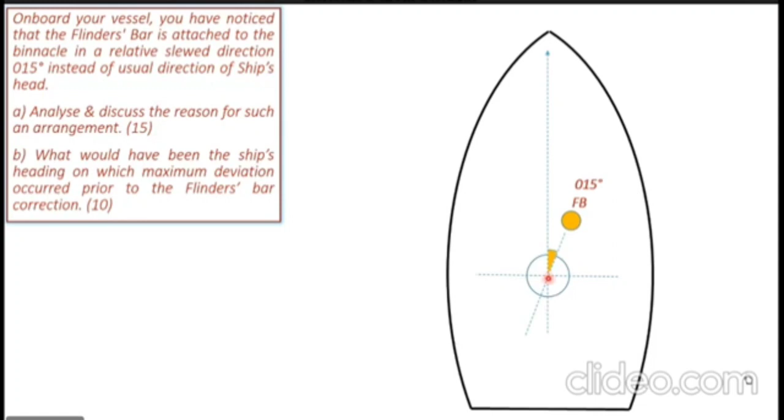But in this case, the Flinders' bar is slewed 15 degrees. That means the magnetic field generated because of vertical soft iron is not aft of the compass. The magnetic field which is generated must be opposite to the direction where the Flinders' bar is. So whatever magnetic field is there on the ship because of vertical soft iron will have a resultant direction opposite to where the Flinders' bar is.

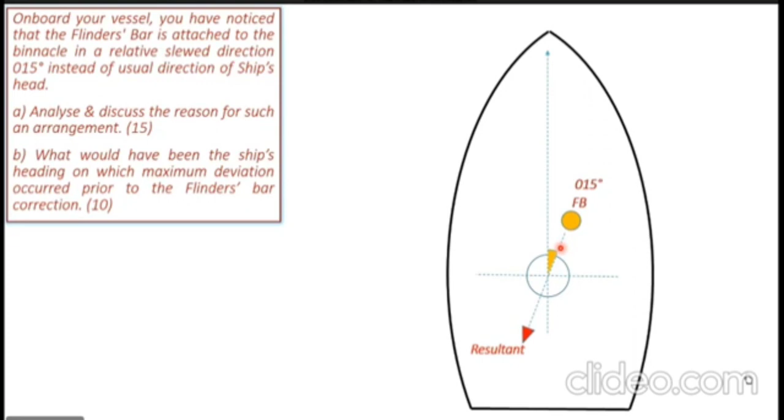As you can see, this red color arrow shows us the direction of the resultant magnetic field caused because of vertical soft iron. So if the vertical soft iron causes a field in the direction of the red arrow, the Flinders' bar is fitted. The yellow color round represents the Flinders' bar, will cancel its effect, and the compass will be corrected.

Now, how can we have the resultant in this particular direction? We are aware that exactly aft of the binnacle we will have the funnel. So you can see the funnel now coming up in the diagram.

So the funnel will be exactly aft of the binnacle. The resultant is slightly towards the port quarter. That simply tells us that there has to be a vertical structure on the port side of the compass or port side of the binnacle. You can see a vertical structure now coming up towards the port side of the binnacle.

So the resultant of this vertical structure and the funnel falls in the direction of the red arrow, and this resultant is what our Flinders' bar is correcting. So that brings us to the answer of the first part of the question.

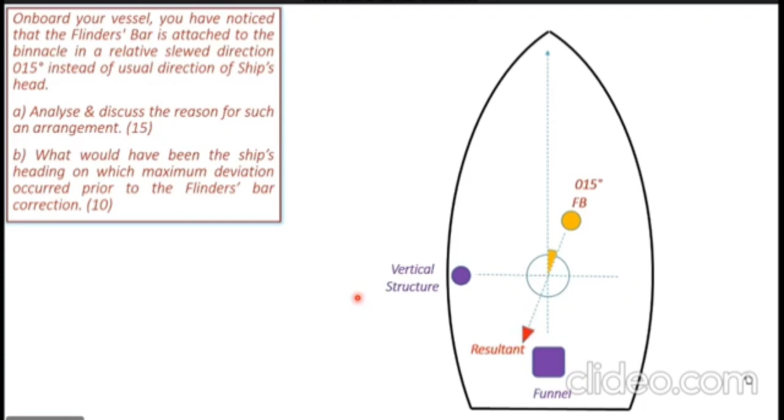The first part answer basically is that the Flinders' bar is slewed when induced C is also present along with induced B. So that tells us that there is a vertical structure on the port side of the compass. Any vertical structure to port or starboard of the compass generates induced C. So this is the analysis for the first part of the question.

Now the second part of the question says, what would have been the ship's heading on which the maximum deviation occurred prior to the Flinders bar correction?

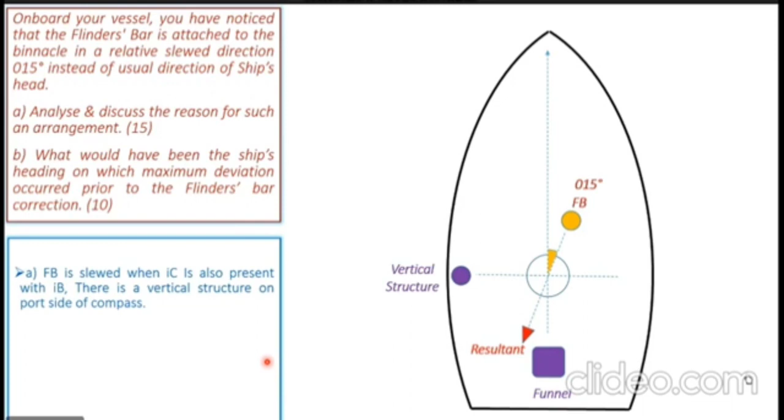The meaning of this question, part B, is that we have seen that the resultant of induced B and induced C, from the funnel and the vertical structure, lies in this particular direction, in the direction of the red arrow. Now, what is the heading on which this resultant would cause maximum deviation? For any magnetic force to cause maximum deviation, it should act at right angles to the magnetic needle.

You can see it here also. Maximum deviation because of any force or magnetic field occurs when that force, in our case, the resultant of induced B and induced C, represented by the red arrow, acts at right angles to the compass needle, or at right angles to the magnetic lines of force which run in the north-south direction.

You can also represent it in this way, that the maximum deviation would occur when the resultant should lie exactly east or exactly west of the compass. So if we take the ship on such a heading that this resultant goes to exactly east or west of the compass, that is the heading on which the maximum deviation would occur. So let us see that now.